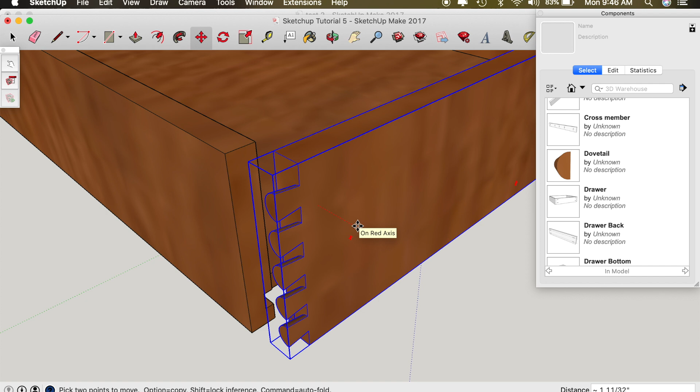Okay, we're going to wrap up our tutorial on drawer making in SketchUp with the dovetail pins. As you guys know, last time we were making the dovetails on the drawer sides, as you can see right there, and we need to make the adjoining pins or sockets for the tails to be accepted in the drawer front and back. So using our components window that we have open right here, as you can see, I saved the dovetail as a component, so we're just going to utilize it to insert that particular tail into the drawer front, and then we're just going to remove the negative parts of it.

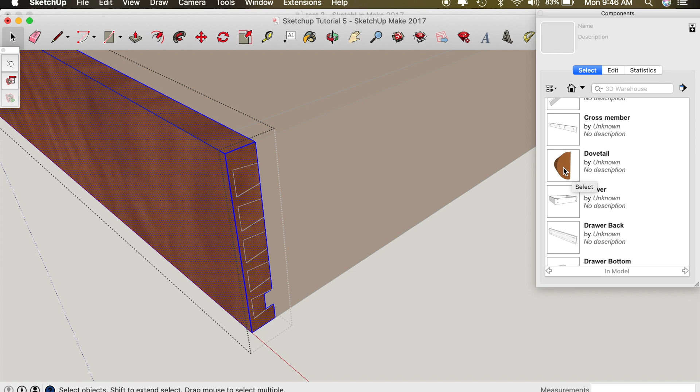So highlight the drawer front, and you can kind of see that we still have the outline of the tails from the side right here. So I'm going to grab the tail and bring it into play right here. Grab the corner and then snap it to the line of the tail that's on the drawer side.

Now we're still working in the drawer front because you can see the dotted halo around. So we're in the edited portion of this component, but it gives us the outline of all of the tails, so we're just going to utilize that to our advantage.

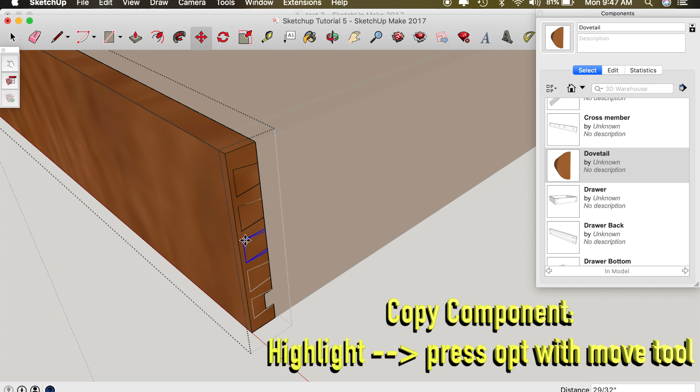So just copy this tail to every location, and then hide your drawer side. So now you can see the outline of the tails for the sockets.

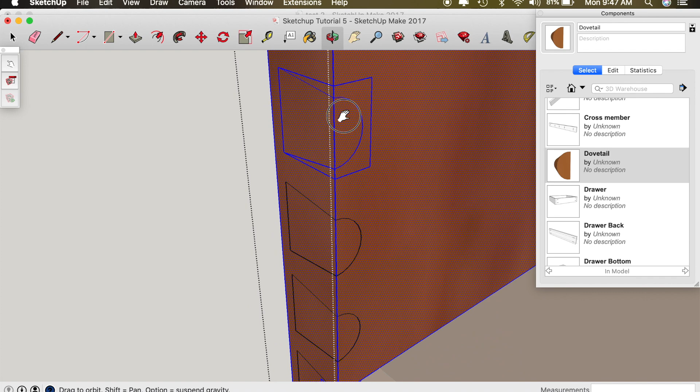So now all we got to do is go into here, highlight every single socket, because they're still separate components, so we need to combine these by exploding it. So hit explode. So now they're all separated.

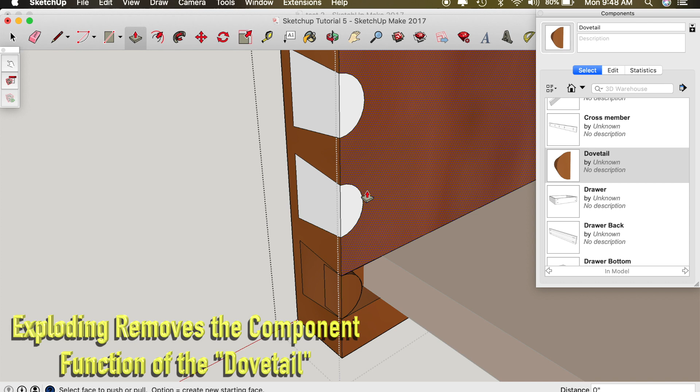You can turn your push-pull function on and kind of verify that. See there? So now there's a divider line amongst all of those. So all you have to do now is just click the surface area and hit delete, and then get rid of the line. Click that surface area.

Now this one has the dado that we made, or the groove for the drawer bottom, so there's going to be some extra work to do here. But we'll go back to that in just a minute.

Go ahead and clear out the rest of these. Get rid of the line. And the last one up here, get rid of that line.

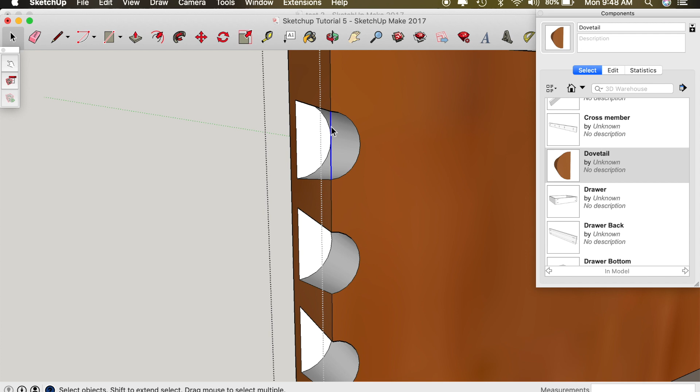Okay, now I'm going to come back down here where the drawer bottom is at. And you can kind of see there should be a joint line, a black joint line right here, but there's not. So we need to make one by intersecting the faces.

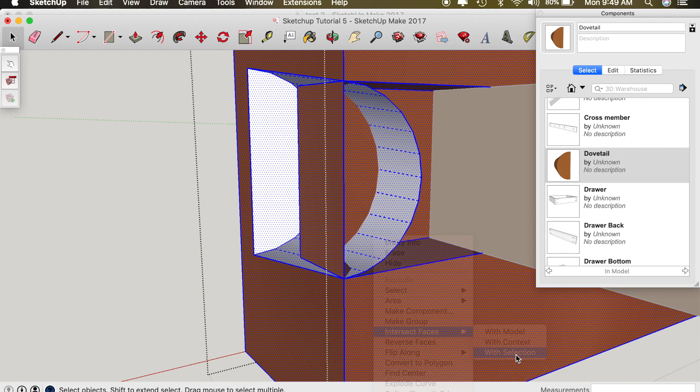And if you remember to do that, you just highlight the entire model or the entire component, right click, and intersect faces with selection. So now you can see a black line has been inserted between those two surfaces. So now you can get rid of the faces around that area.

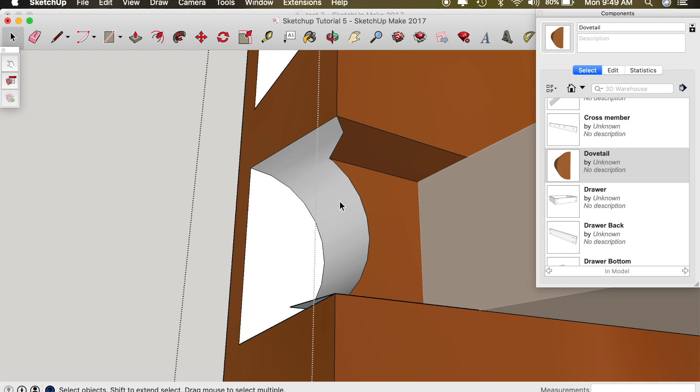You can use your eraser tool if you want to do this as well. Just turn on E for erase, like that. So now all of those surface areas are gone, and you can make the same color all throughout now, just by clicking on the paint bucket and selecting that wood color we were already using.

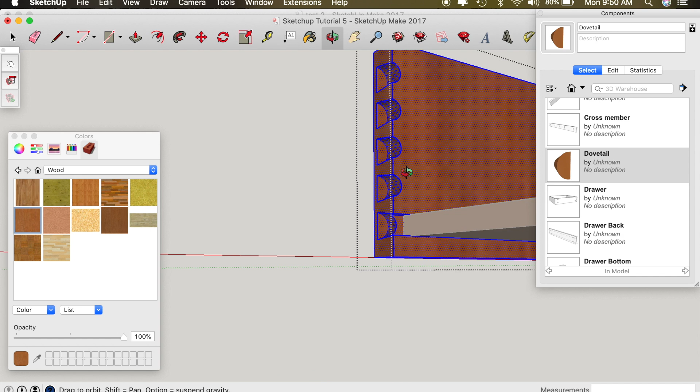And now we have the pins. So if I bring the drawer front back in, it now sets and does not have a divider line that you obviously saw before. And the drawer bottom groove is now invisible because it's hidden by the dovetail we just made. So this is pretty cool.

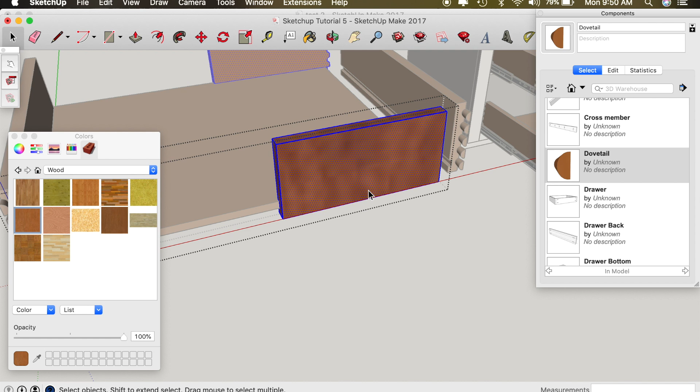You can do this on all the ends of the board, and the quickest way is by copying the other end. So what we can do to make that fast, I'm just going to shorten this up. Then while I'm still in the component, I'm going to copy - oh, gotta highlight it all, sorry. Copy it and drop it out here in space a little bit. Don't connect it yet.

Now the pins right here on that end, I want them on this end, so we're just going to flip it along the red axis. There we go, now they're on this end. So let's pull them into position where they need to be over here. Snap it.

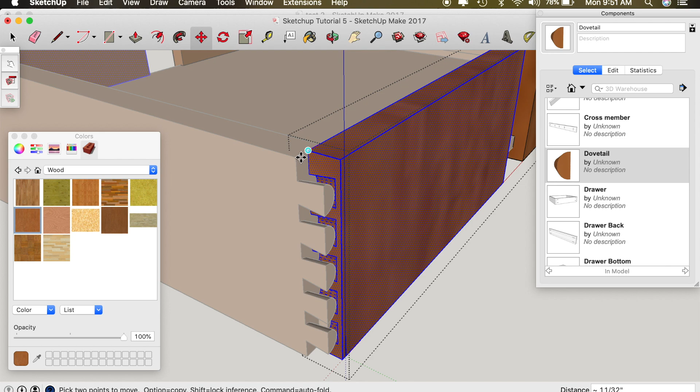Okay, now using your push-pull function, join the two together, and then hit your eraser function and just get rid of the joint line.

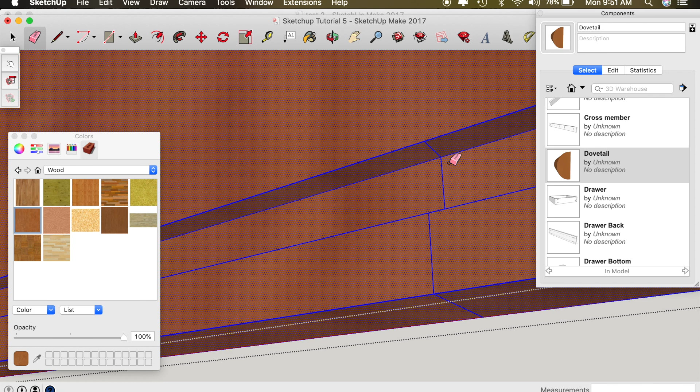I'm going to hide the drawer bottom so I can see the rest of it. Go back into it and start removing lines again. Got one up here I didn't get. There we go. Go to the other side, make sure I got it all.

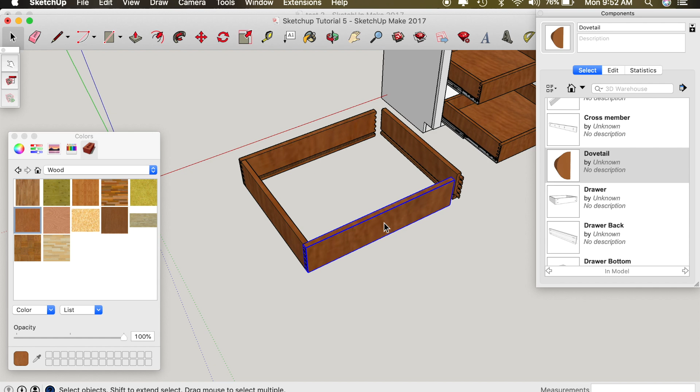Yep, okay. Now by copying inside the component, it allows you to affect the other component behind here, which is basically a copy of it, and you won't have to do it at all. If you copy while not being inside the component, where it's just highlighted, it will not affect this one. So make sure you're inside editing like this before you make your copy.

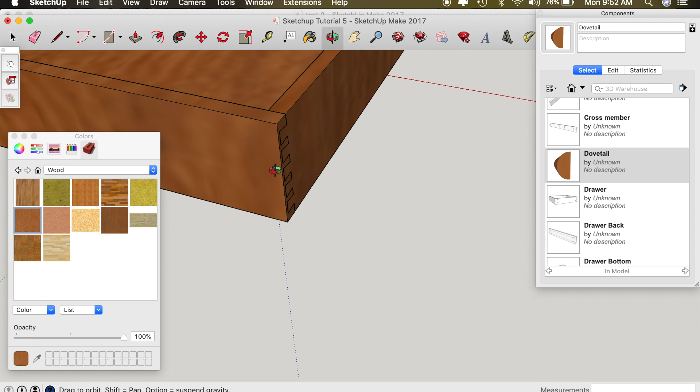That way you can push and pull and drag them together and then do all the erasing of the joint lines. Otherwise you'll have to explode it and then combine the two and make it a component again. So now that those are done, we'll pull the drawer dovetails back into place where they need to be, unhide the drawer bottom, and our drawer is complete with dovetails all the way around.

So as you guys can see, that was pretty easy to do. Utilizing the drawer side to get your lines just by copying your component and then exploding it all makes it super simple to make dovetail pins after you've already made the tails. The tails are probably the hardest part because it requires a lot of layout, but save it as a component, that way you don't have to do it again.

So be sure and join us next time. We'll start with cabinetry basics in SketchUp, and by the time we're done, we'll be able to design a kitchen. So this should be good fun.